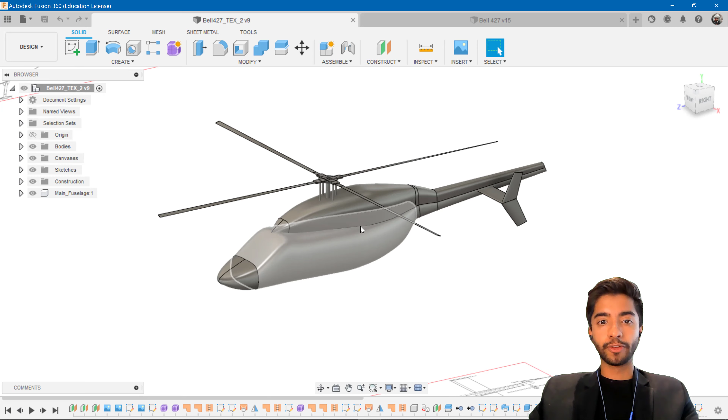Let's get cracking straight on to Fusion 360. Okay, so the last time we left off with this rotor section, and what we did was create this section over here, which is sort of the base or the hub of the rotor and the blades themselves.

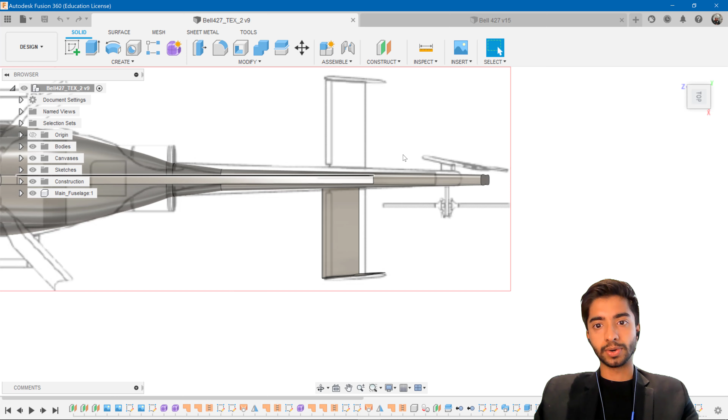In this tutorial, we are going to be focusing on the tail section. Now, I do remember saying that if you wanted to follow along to the tail section, you could just follow what I did with the horizontal stabilizer and recreate the tail section over there. You could also consider making the blades on the back similar to how we made the blades for the main rotor. But this is more of a follow-along video than a proper tutorial, just because the techniques I'm about to show you are something we've already covered.

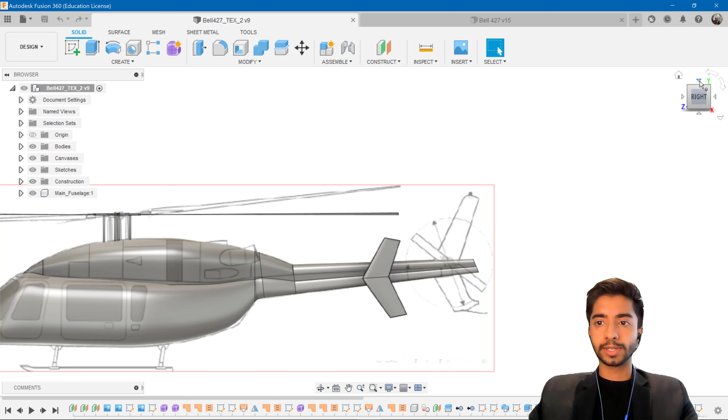All right, so let's get started. The first thing I'm going to work on is this back tail over here. It sort of looks like a boomerang. And what I'm going to do first is extrude something outwards in that direction, so right over there.

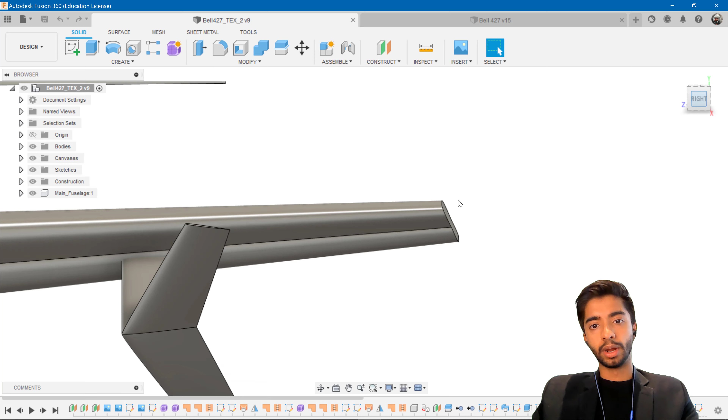And then we're going to slice that part over there at an inclination, and then we're going to draw this boomerang shape there. So first of all, let's just extrude onto the other side.

As you can see over here, the airfoil section is only about this small, so the chord of that airfoil should only be this small. So what I'm going to do is, from the top view - we're still sketching on the right plane, by the way, but I've switched to the top view - I'm going to hover my mouse somewhere near that section there, because that's where the line of the airfoil ends.

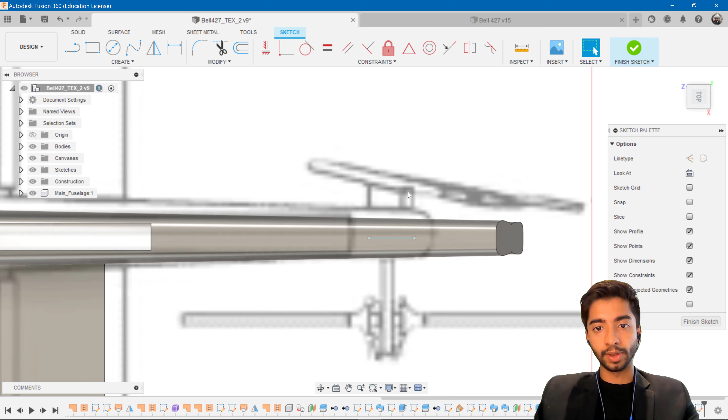And I'm going to drag backwards till the end of that airfoil. If you were confused why I did what I just did, all you need to do is follow my mouse. You can see that the airfoil starts over here, so I'm going to drag that, and it ends over there. All right, so that's now our new chord line.

However, you can see this is in quite a bad position, so I'm just going to press M on my keyboard to move this up. All right, so it's as simple as that. Okay, and I'm going to press OK. Now, we know that this is a chord of the airfoil, so I'm going to turn this into a construction line.

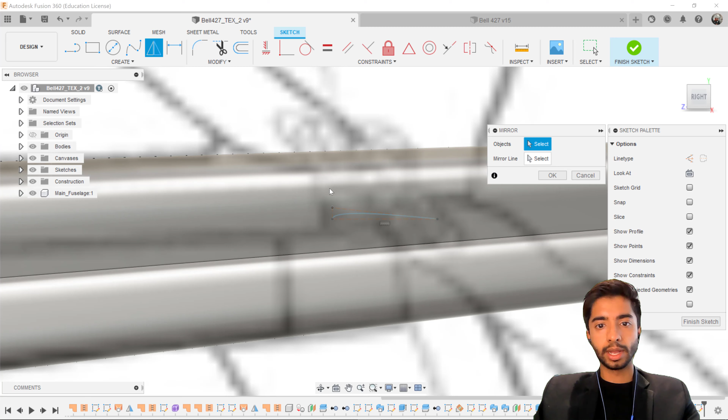I'm going to go to Create, Spline, Control Point Spline, and I'm just going to draw an airfoil there. Again, I'm just going to mirror this for simplicity. If you do know which airfoil you are using, please go ahead and use that one. All right, I'm going to finish the sketch here and go back to the top view to make sure things are still all right, and they are.

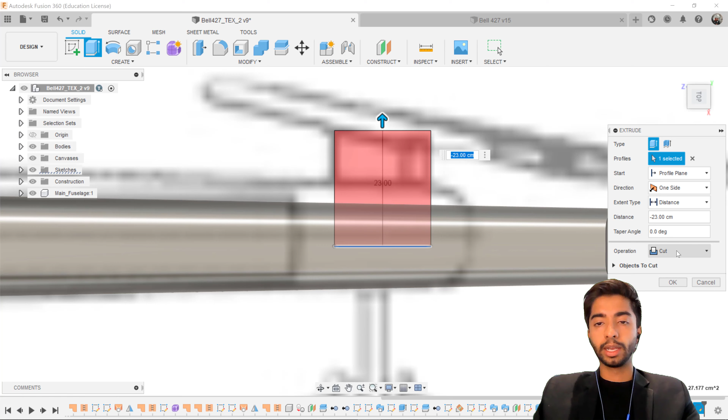Okay, I'm going to go ahead and press Extrude and make sure you've selected that surface there, and just drag it out till this position. Again, obviously instead of cut, we want to make it a new body, and I'm going to go ahead and press OK. And there we have it.

So that's our first main step. We're not going to mirror this because on the other side we only have this rotor section, and we only have that boomerang section on the top. I do apologize for calling this a boomerang again and again - I do not know the technical term for it, so please bear with me.

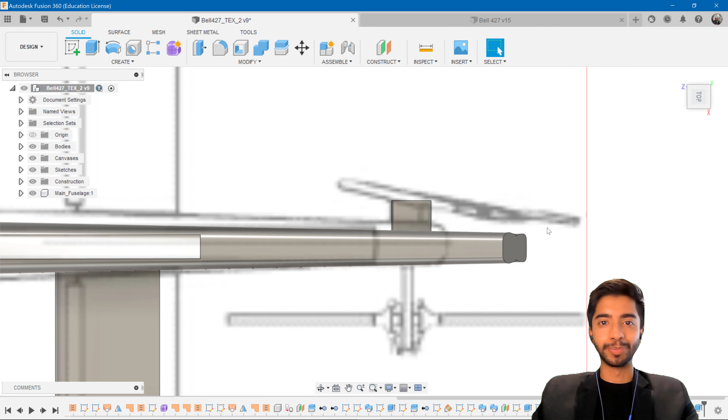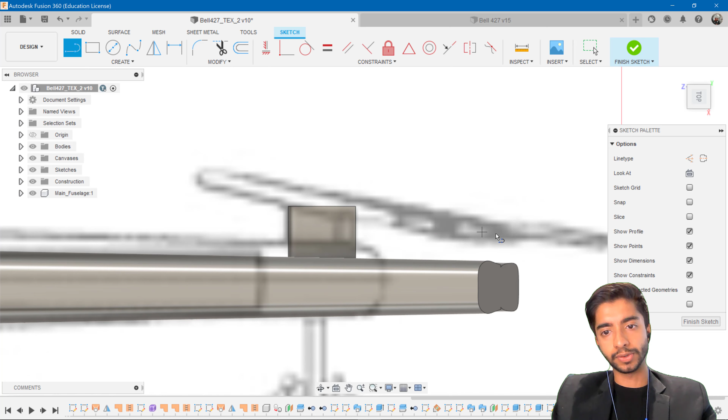Okay, now we're going to go ahead and slice this at an inclination. So just grab the Create Sketch tool, and you can draw on the top plane. Currently it doesn't really matter where the sketch is, because we're just going to be using it as a knife. So I'm going to press L on my keyboard, and what I want to do is draw at an inclination similar to this top view of the boomerang. So I'm going to maybe do it something like that.

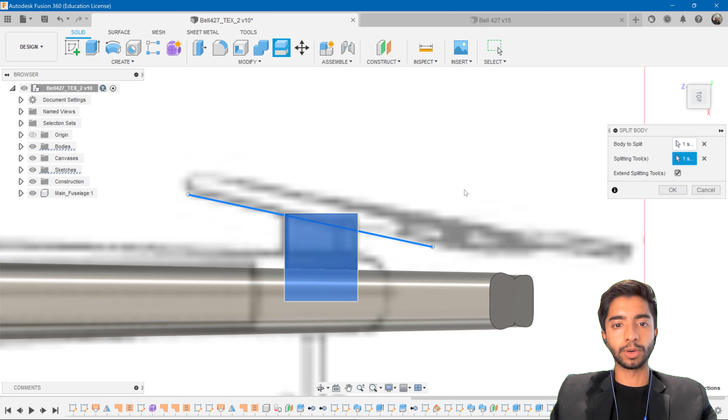I'm also going to leave a little bit of space here just in case there's a problem with the slicing. Okay, I'm going to finish the sketch, grab the split body tool, click on this one as the body to split, and the splitting tool is going to be this one. I'm going to go ahead and press OK.

Now, if you open up your bodies folder, you'll see that this is the one that we want to remove. So body 94 in my case. I'm going to right click on this and click remove. And there we go, we don't need that anymore.

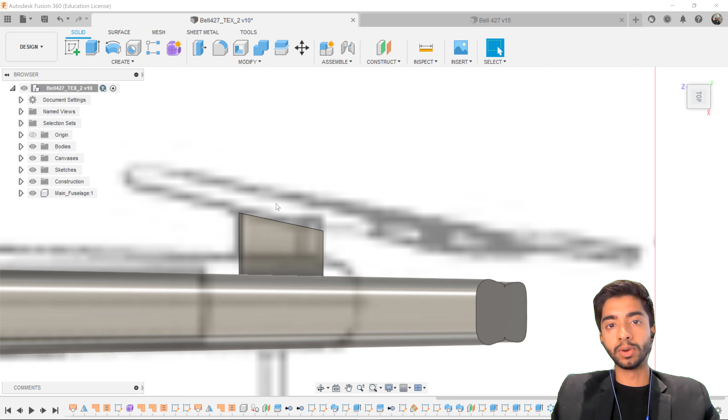Okay, now the next thing we're going to do is create the airfoil, which is orthogonal to the airfoil we had created on this surface. So what I'm going to do in order to do that is just revolve around till you can see the other section of the airfoil over here.

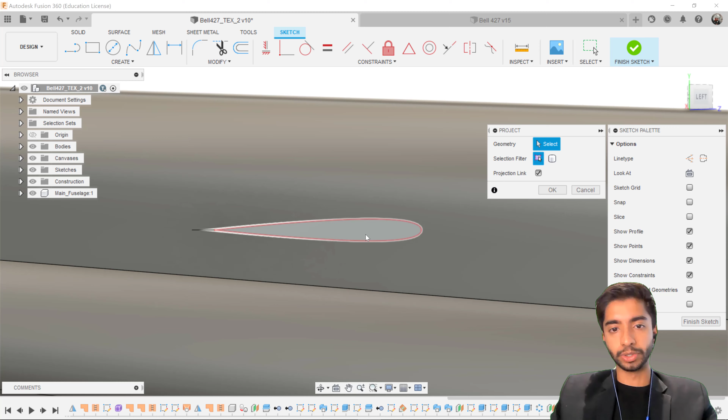I'm going to create a sketch on this plane, so that's the new surface that we just created, which is at an inclination. I'm going to press P on my keyboard to project, and I'm going to press OK. Then hopefully we will get two of these points, so the one is the leading edge, the other one's the trailing edge.

So I'm just going to draw a line between these two. Okay, and I'm going to finish the sketch. So we need this line to be able to create the orthogonal surface.

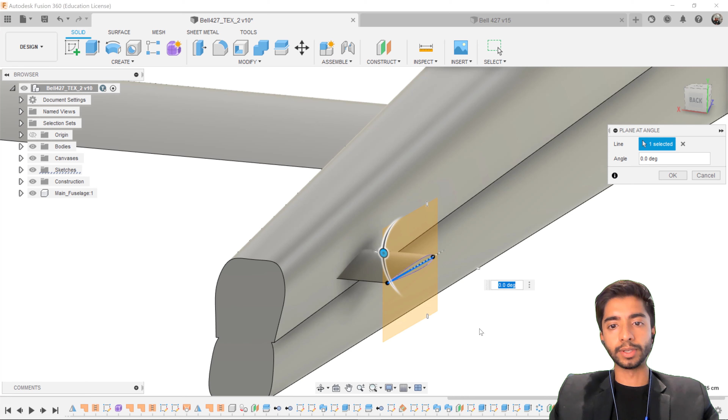So construct plane at angle, and you can just click on this. But instead of 0 degrees, we now want it at 90 degrees. So now this is at 90 degrees to the airfoil that we created earlier.

Great, now we're going to go ahead and create a sketch on top of this new plane. Now, because we selected that plane to sketch on, it will obviously take us to the top view or something close to the top view. What we want to do instead is leave the sketch on the top view, but go to the right-hand side, just so that we can measure where the boomerang starts and ends at that point.

So I'm going to click the line tool, and you can see this sort of cursor, which is a line. It's not actually a line, it is a cross from the upper direction, but when you look at it from this direction, you can only see a line.

So what I'm going to do is, if you just follow my mouse, you can see that this is where the boomerang is going to end. So I'm just going to click over there, and I'm going to drag that line back till there, because that's where the boomerang is going to end.

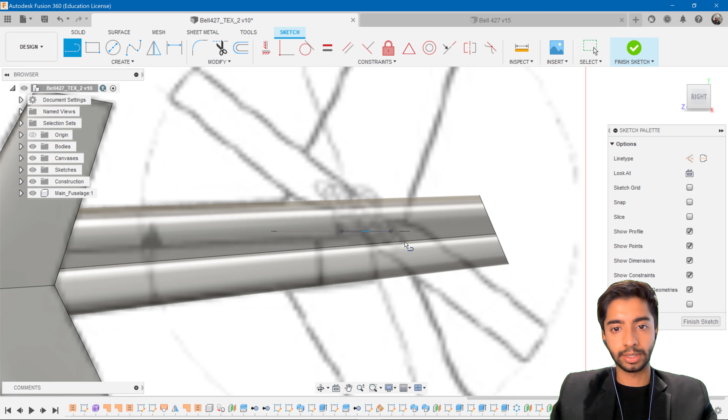Okay, now if you go back to the top view, you can see that we've just created that line, and I'm happy with this, so I'm going to stick to this line right now.

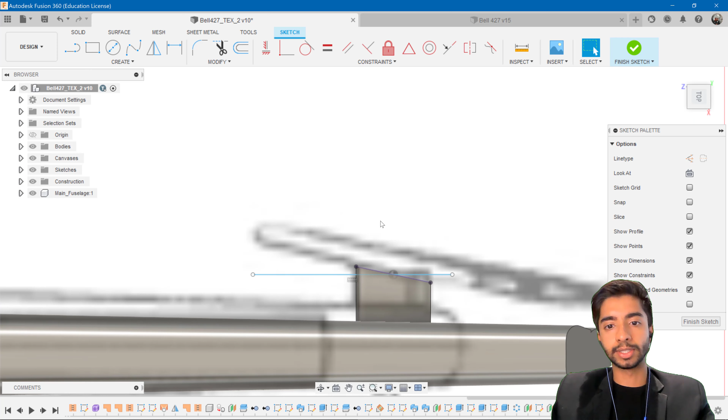Now what has happened is that this has become a line which is parallel to the line of symmetry, but we want this to be at an inclination. So what I can do is press escape, press P on my keyboard, and project this purple line over there. I'm going to press OK, because that is the inclination that we want.

I'm going to press L on my keyboard again, or you can click the line tool there. Start from this point, hover over to the purple line, but do not click anything. Just hover over the purple line and drag upwards till you see it automatically snapping. This snap is basically representing it being parallel to the purple line. You can see the parallel marks on the purple line as well as the new line that we've just drawn.

Okay, and the other thing you can do is hover over this point, but do not click, and you can just drag up, and you can see that this is now right where the line should be, the point, and it's also parallel to the purple line that we wanted. It's a neat little trick of hovering that Fusion 360 is really good at.

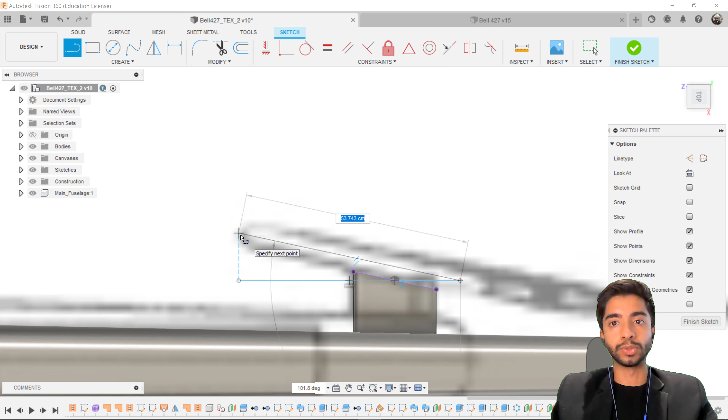Okay, and now we can just double click and the line is created. Now I'm going to press T on my keyboard to trim this line because we no longer need it. And there we have it, that's a good section that we need. I'm going to trim that as well. Okay, maybe we can't, let's just leave it there.

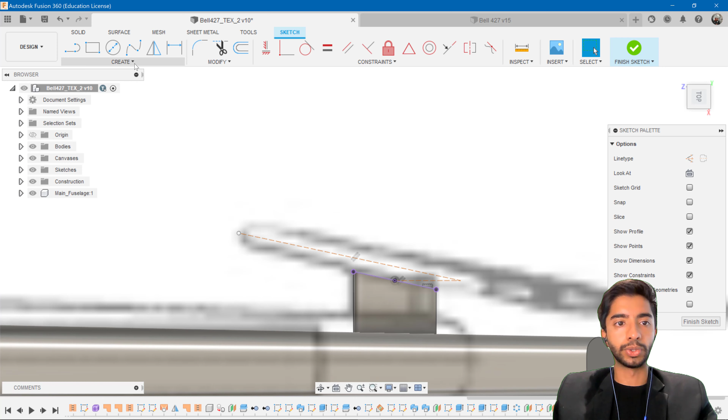I'm going to turn this and this into a construction line. And I'm going to create spline, control point spline, and I'm just going to draw the airfoil over here.

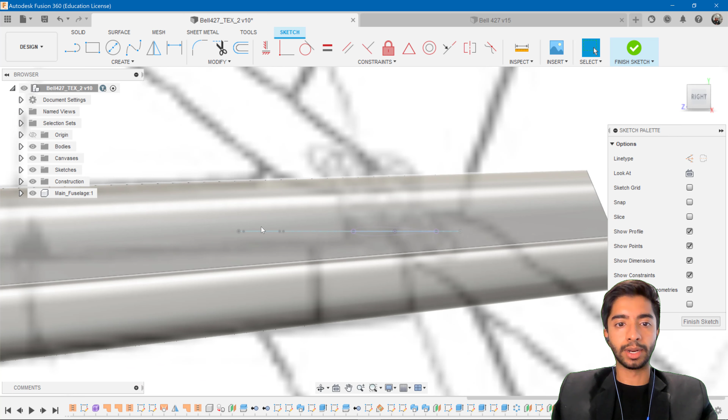Okay, and again, if you do know which airfoil you want to use, please go ahead and do that one. Mirror, so I'm going to select this one, and the mirror line is going to be this one. There we have it, simple. Okay, now let's go back to the right view to make sure that it is indeed the correct position, and it is. Go back to the top view, and it's covering that very, very well.

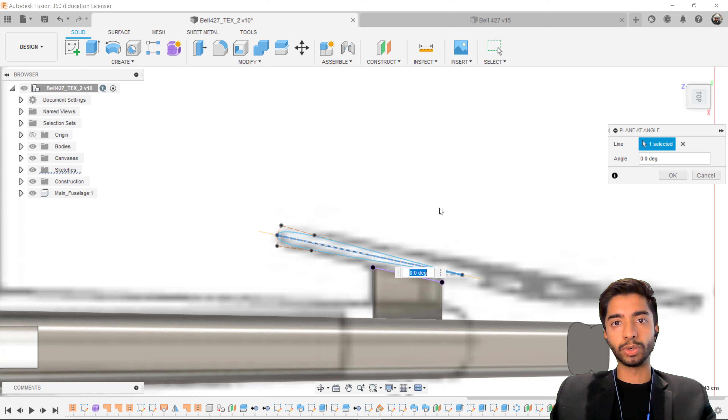Okay, now we're going to be using this airfoil to sweep the boom shape. So I'm going to go ahead and finish the sketch. Okay, so once you've clicked on Finish Sketch, now let's go ahead and construct a plane at an angle, and we're going to choose that line over there, which is the chord of the airfoil, as our reference line. Okay, and if I revolve around, we do want it to be at that angle there, so I'm going to go ahead and press OK.

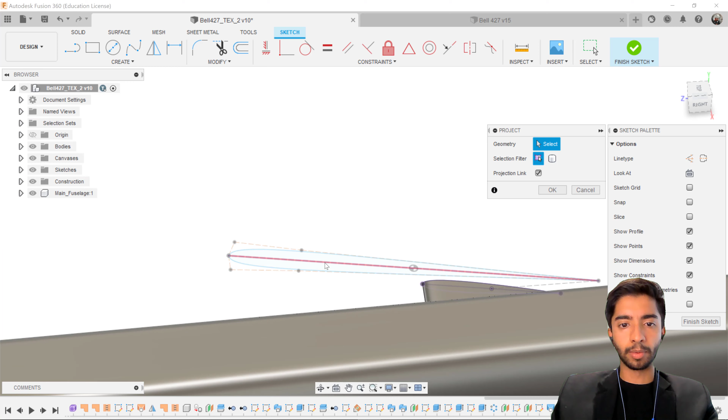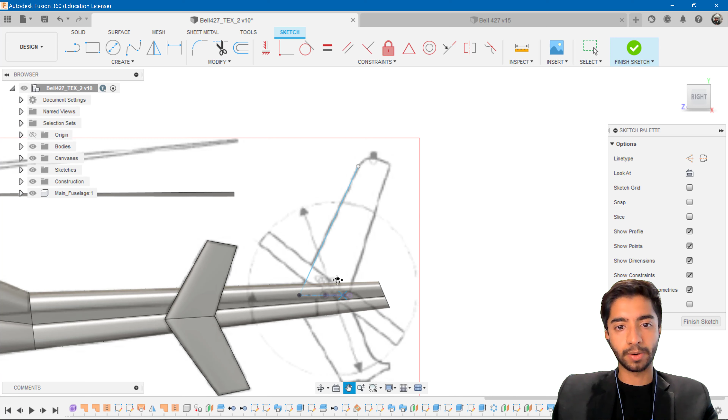Then you want to create a new sketch on top of this new plane. All right, and hopefully it should take you automatically to that reference line. Now I'm going to press P on my keyboard, and I'm also going to project that chord line again. And you'll see why this is a neat little trick to have. Okay, I'm going to press on the line tool, and I'm going to let it snap to that purple section that we just projected. Go back to the right plane, and I'm going to drag this upwards till where it's a straight line. So somewhere till there. All right. And similarly, I want this to snap from there to there.

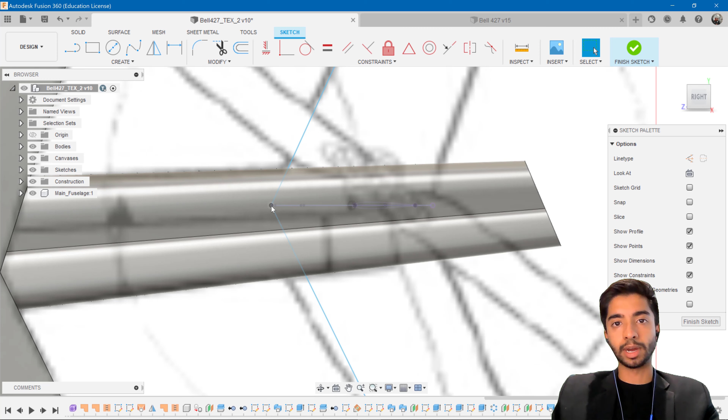Now you can tell there is a bit of a misalignment between the blueprint and the sketch that I've just created. And this is because I estimated where that position would be when we were first creating the first airfoil. If you want to, you can just go back in time and drag that point forward and come back to the present time in the timeline, and hopefully it should fix itself. It's a neat little trick that Fusion has.

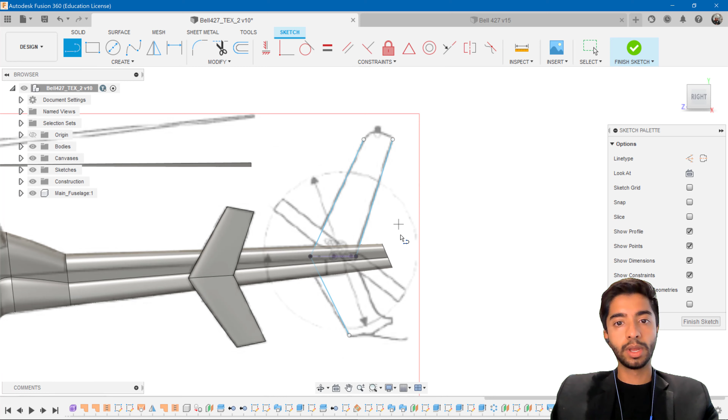Okay, and I'm going to create a new line, and I'm going to let it snap to the back point of the sketch we projected. Go back to the right view, and then I'm just going to drag this up till somewhere here. Okay. Similarly, I wanted to do the same thing in the back, so somewhere there. And now you can see we have some interesting geometry over here. So it's not really straight anymore, but it is an arc.

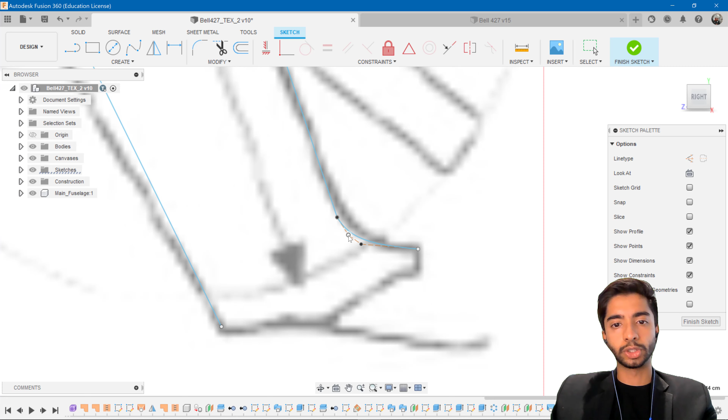Just to approximate that, I'm just going to create a spline. So I'm going to click on that, go there, and maybe just do it till somewhere over here. Okay, and we'll see how Fusion sweeps this out and how the geometry works. And obviously we can go ahead and change it later on. So first off, I'm just going to finish the sketch over here. Okay, and now what we're going to do is sweep.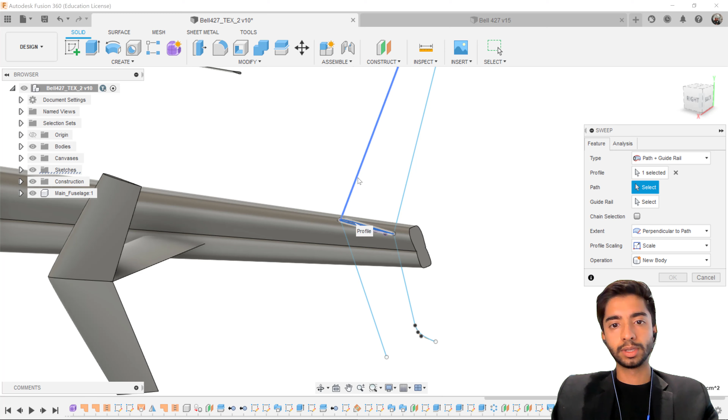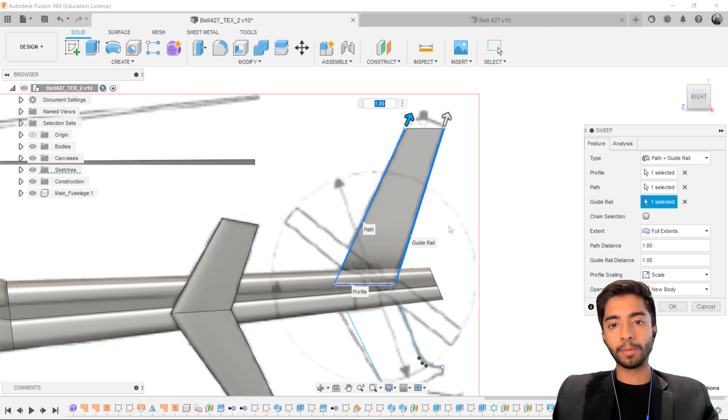So create, sweep, and instead of saying a single path, we want to say path plus guide rail. The profile we want to select is this one. For the path, you just deselect chain selection for now. Path is this one, and the guide rail is this one. If this doesn't work, just try swapping the path and the guide rail, and hopefully it should make sense. Now, currently we have perpendicular to path, but if we want to, we can just say full extents, and there we go. That is how our boomerang looks now. Okay, I'm going to go ahead and press OK.

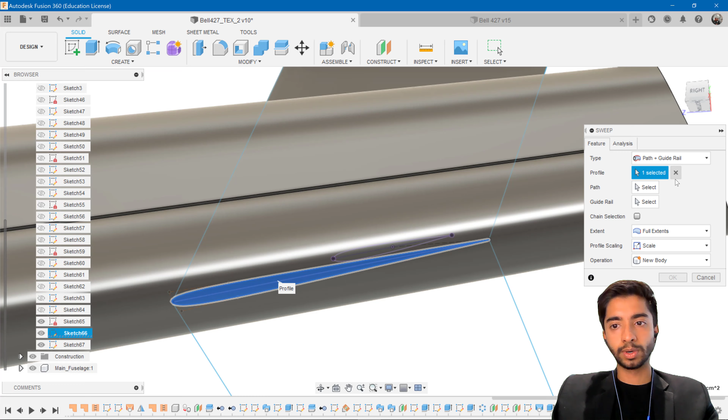And now we're just going to repeat the process. So go back to the sketch and activate the last sketch that we created, because we still are not done with it, and also the one before that where our airfoil is. So I'm just going to go to create, sweep, again, path plus guide rail. The profile is this one, the path is this one, and the guide rail is this one and this one, because we still want that little section over there. Again, instead of join, I'm just going to say new body for now, just in case there are any errors in the future. Okay, I'm going to press OK. And there we have it.

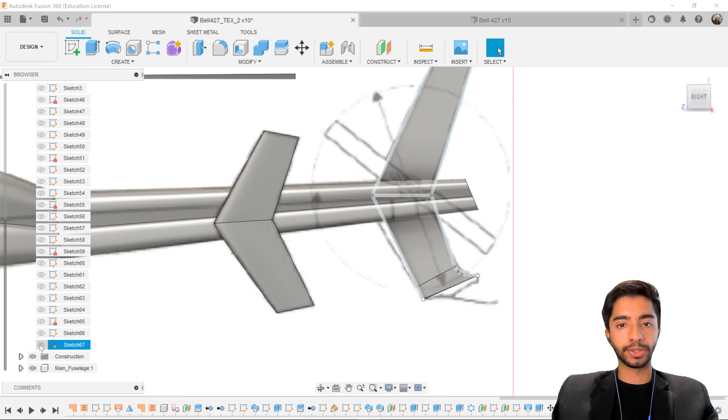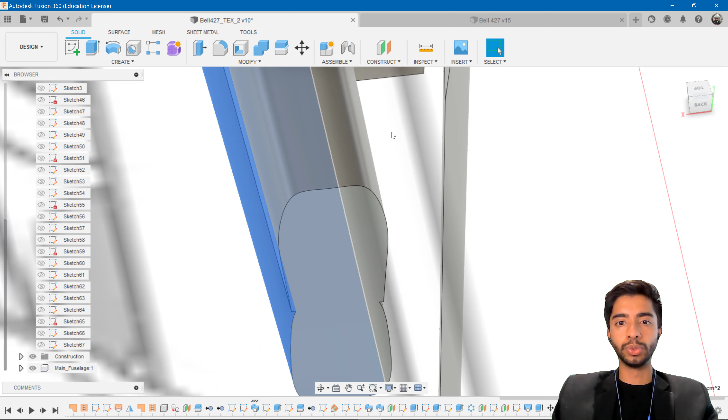So now we can hide all the sketches from before, and that is our boomerang section completed. Now, obviously, if you wanted to thicken up the airfoil, you can, and you can see there is a little bit of a gap between the boomerang and that shape over there. If you want to bridge the gap, you can either choose to take the boomerang and put it inside, or you can just extrude this span over here a little bit more. So I'm going to press extrude, and I'm going to select that airfoil surface there and just bring it forward. So you can either do that, or you can pull it back in.

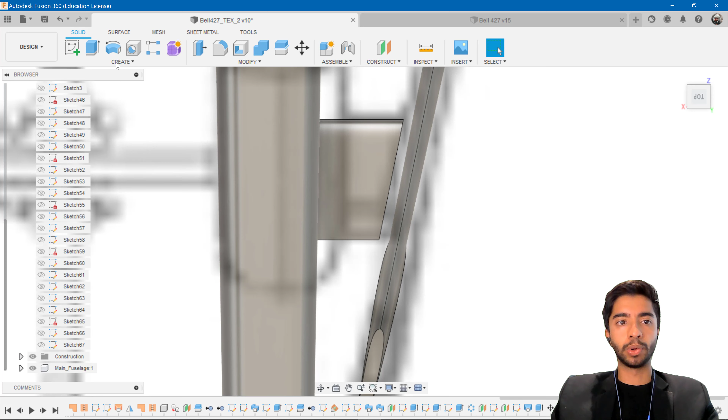Here you can see that it's actually done it at an inclination, because that's what extrude will do. So instead of extrude, let's try press pull. So under modify, we can click on press pull.

And now if I just hide this body and this one as well, and what I want to do is click on this one, bring back the two bodies just so I could select it, and then pull it. Okay, and now hopefully it should be straight. Yep, so that's the difference between press pull and extrude.

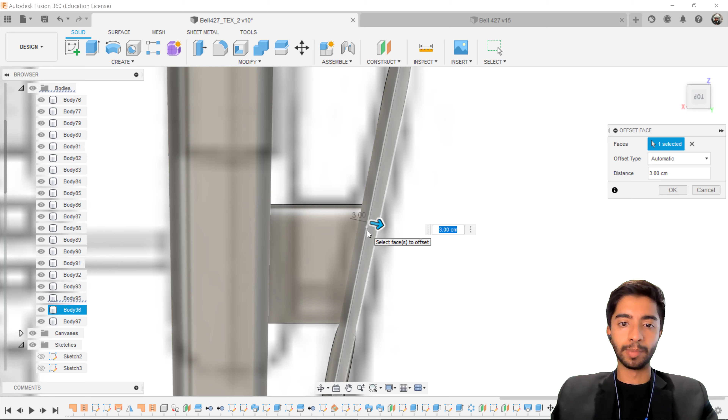Extrude will literally take the cross section you've given it, and it'll just extrude orthogonal to that section. But press pull will make sure there's continuity with the previous section that it was in. Don't quote me on this. This is just what I've seen with experience, and hopefully it makes sense to you as well. All right, so I'm going to go ahead and press OK over here, and now we can go ahead and work with the rotor section.

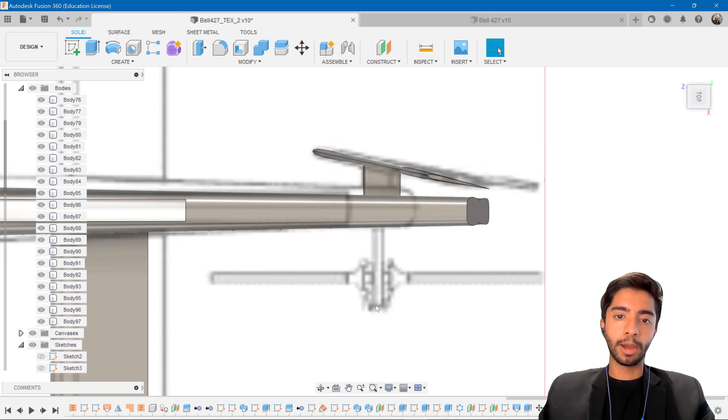Okay, so the first thing we're going to do is create just that cylinder over there. So the cylinder that's poking out, and again, I'm just going to make this very, very simplified, and it's purely for visual purposes. If you want, you can just follow along to what I did for the main blades of the rotor of the helicopter, because that's pretty much what I'm going to do over here.

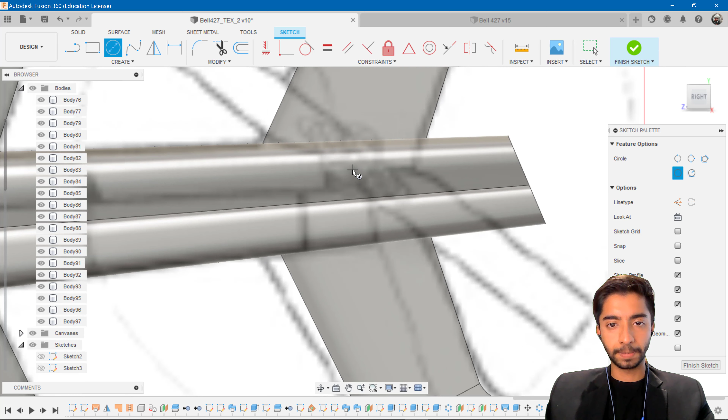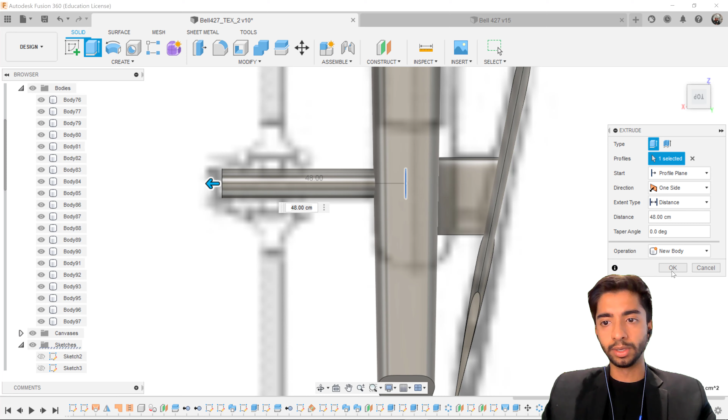Okay, so I'm going to create a new sketch on the right plane, and then I'm going to press C on my keyboard to create a circle, and I'm going to do that somewhere over here. Okay, and maybe I want to make this 7.5. Finish sketch, and I'm going to extrude that outwards. Okay, that was a good guess of where the circle should be. So I'm going to just leave that till there maybe, and I'm going to say new body and press OK. Okay, that's basically what's going to house the blades.

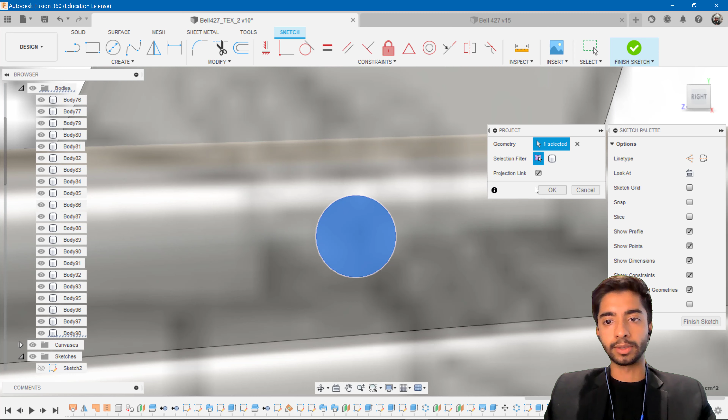Okay, and now we want to sort of flesh this out with a hemisphere on top. So what I'm going to do is I'm going to create a new sketch on top of the end of the circle, press P on my keyboard, project this, and press OK. And now we have the center of the circle. I'm going to press L on my keyboard for the line, and I'm just going to hover over that circle over there, drag upwards, click there, and drag downwards. So now we've basically just created a diameter.

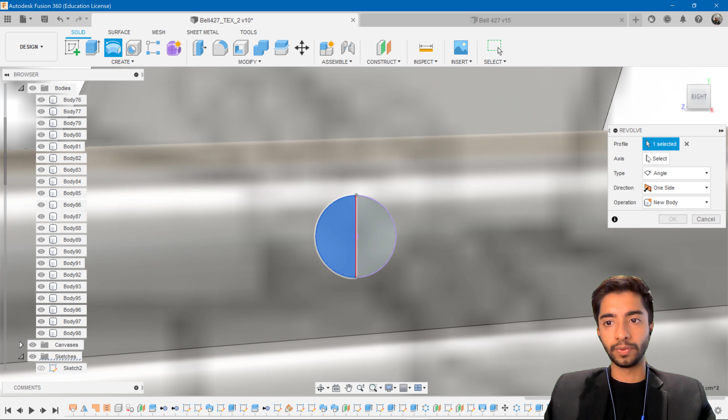I'm going to press Finish Sketch, go to Revolve. The profile we want is one of these, the axis we want is one of these, and the angle is 180 degrees because we don't want a whole sphere, we just want a hemisphere. And you can go ahead and press Join on this. And what you can see now is we've just sort of fleshed that little bit out over there.

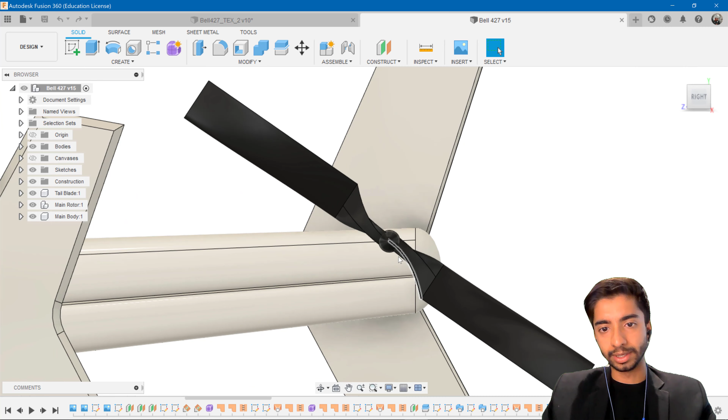Okay, now we can create the blades. Now these blades are a little bit fancy, and I believe in my own model I have also created that twist over there and then just extruded it out. But again, for simplicity's sake, I am just going to have one airfoil over here and one airfoil over here. Maybe we can just create an airfoil over here and just extrude it out, because I don't see a twist over here.

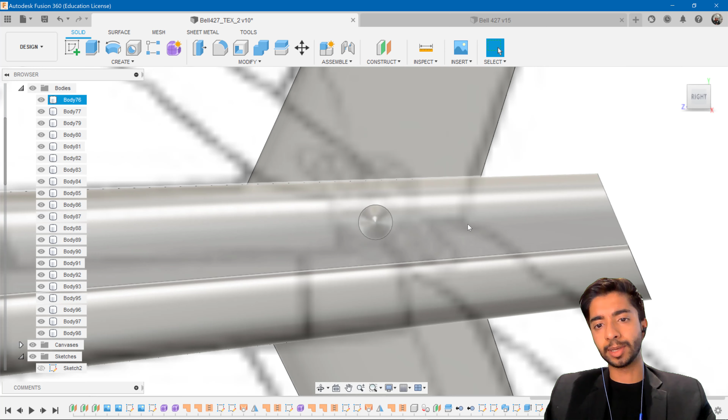If we do want to add something, I think it's going to be between the main hub and that first section of airfoil there. Okay, so first let's create a new sketch on the right plane. And again, we're just going to be creating it purely to be able to create the new plane that we want in the future. So just create that new line, and somewhere over here where this sort of linear process begins with a straight line, I'm going to drag from there to there.

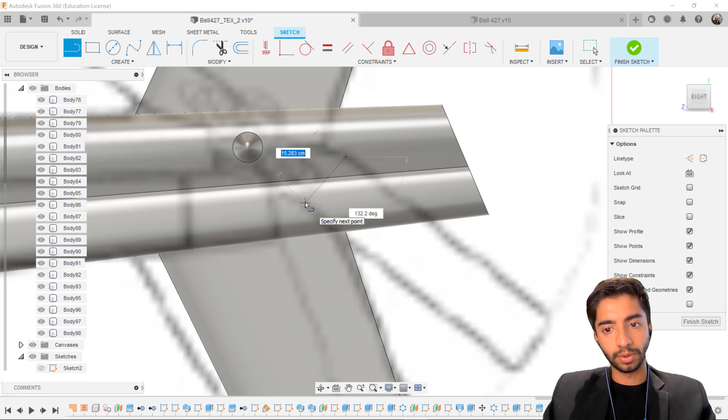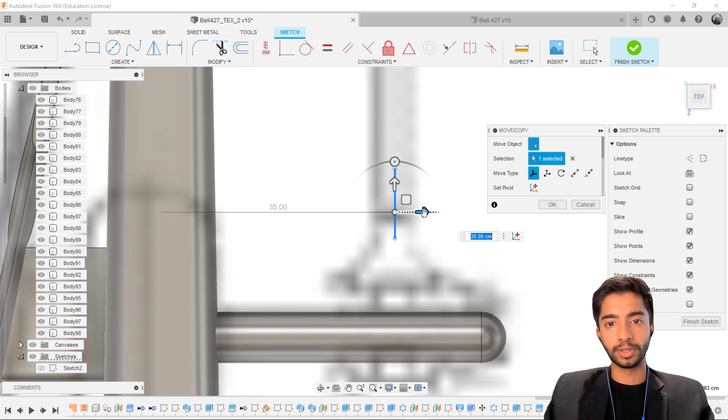Okay, and now I'm going to finish the sketch, or should we first see where it is? Instead of going to the front plane, let's go to the top plane and just click on that line we made, press M on your keyboard and just move that line over here. So to the center of this blade over there, and press OK.

Okay, and now just finish the sketch, construct plane at angle, and click on that line that we just created. Okay, and what this is going to let us do is it's going to create that plane over there on which we'll draw the airfoil. Okay, just press OK, and there we have it.

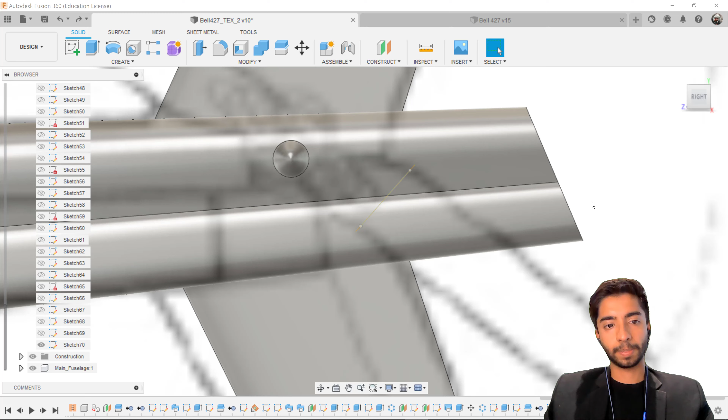Okay, let's keep that line for now, because when we draw on it, we know which direction to draw the airfoil in. So let's create a new sketch on top of this new plane, and we still have this line over here, which we can use as the chord, by the way. So I'm going to click on this and just go into construction, and you can see that hopefully, oh, never mind. You can't do that anymore because that sketch does not belong to this sketch.

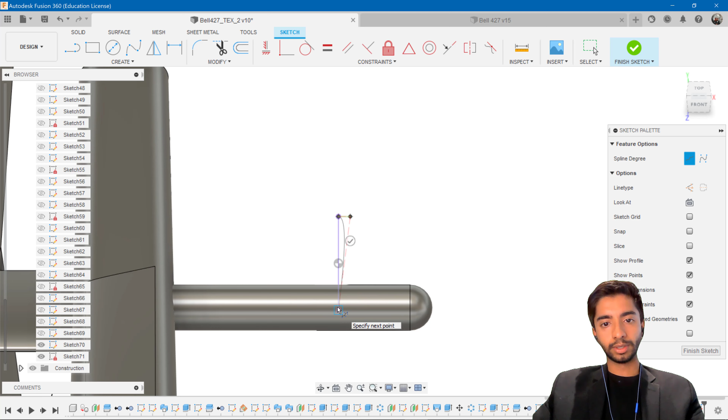So we're going to press P on our keyboard, and we're just going to click on that. And there we have it. That line is now part of our sketch. Great, so now I'm just going to create spline, control point spline, and also straighten my back, and just draw the airfoil in this direction, and then mirror it.

Okay, I don't actually know which direction is the correct one, but for now I'm just going to leave it like this. Okay, finish the sketch, and now I'm going to press extrude, click on that section and that section, go to the right plane, and just drag it out. And look at that, we were very close actually. So if our inclination was a little bit higher, we could have done that.

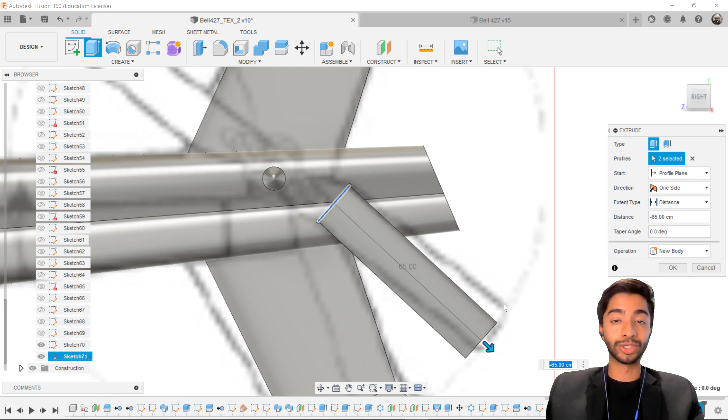Now, if you do want to go ahead and change that inclination, you can. I'm happy with this since this is just an estimate. And also at the same time, the rotors do move. So it's sort of inevitable that they go from there to there. So I don't think this is wrong, but if you want to match the blueprints, go ahead and do that. All right, so I'm just going to press OK now.

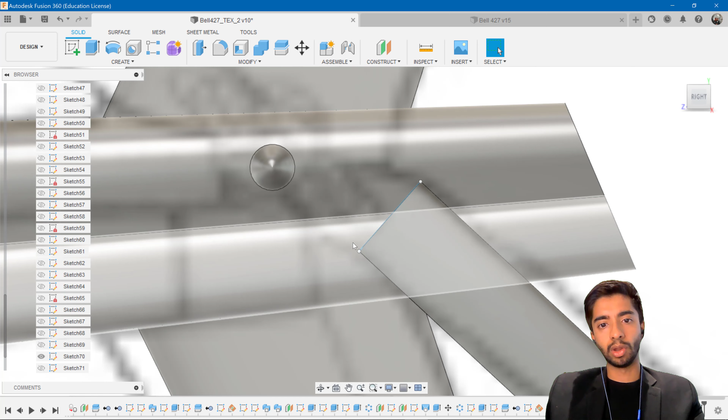And now I wonder if we could just create a sort of loft between this section and that section. So what we can do is we can go to construct, and maybe we can go to axis through cylinder and click on that cylinder that we drew earlier. And you can see this sort of turquoise line coming out of the cylinder. I'm going to press OK.

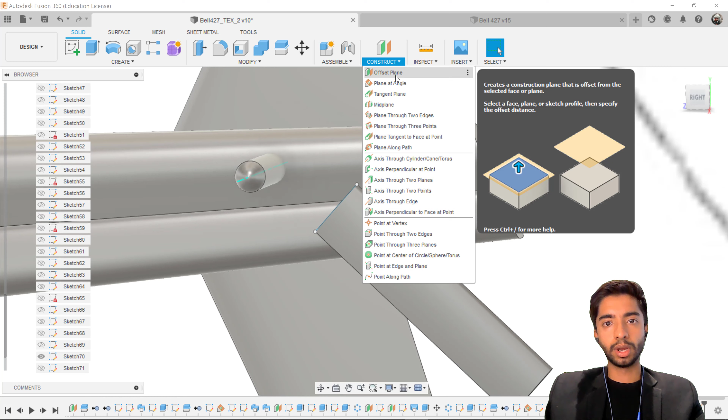And I'm also going to construct plane at angle, and I'm going to use that new line that we've just created. Okay, and this plane should be parallel to that airfoil section there. So for now, I'm just making it 40 degrees because it looks reasonably close enough. Okay, maybe 45, and I'm going to press OK.

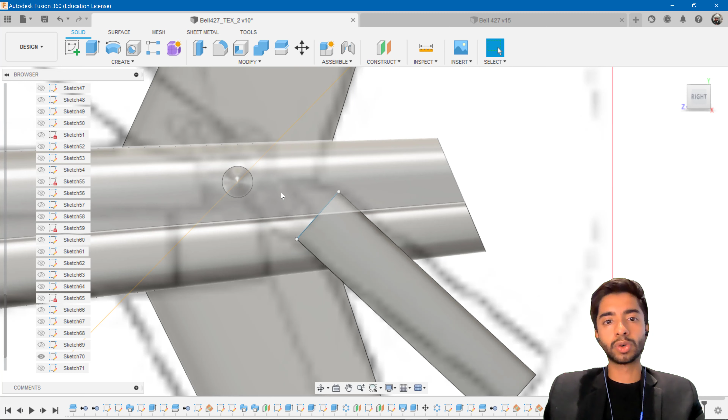And we're just going to draw a smaller airfoil inside this plane, and you'll see why. So I'm just going to click on this plane to draw a new sketch. Press P to project, because I'm going to project that hemisphere. And at this point, if things are getting confusing, don't worry. All the things I'm showing you are very optional things, just adding a little bit of detail.

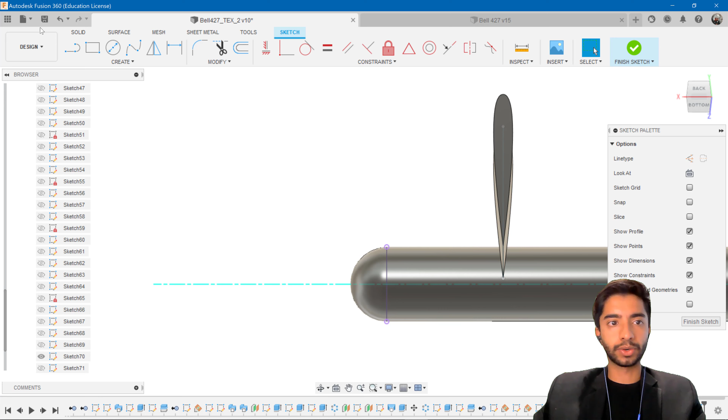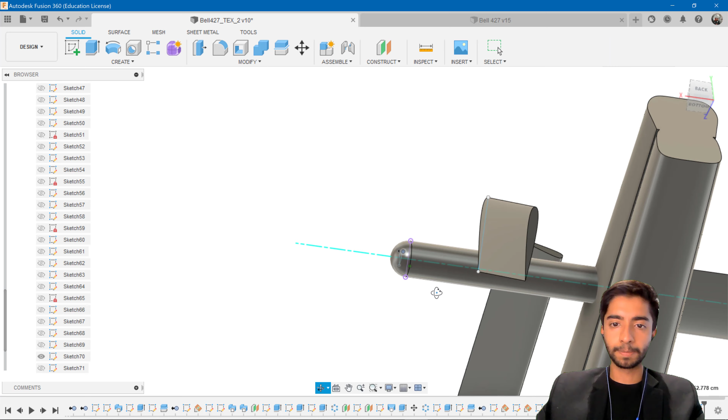Okay, and what I also want to do is create a new airfoil. So maybe the size of that, and create a spline, control point spline, remove the construction, do that, mirror it, our classic stuff basically. Again, this is a little bit thick, so I'm going to thin it out and finish the sketch. Okay, so now you'll see if I go to create loft, so we loft that section there with the section we already have.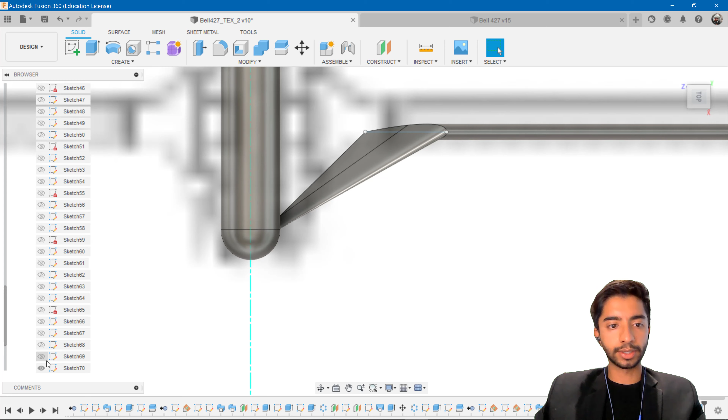So you can see this is interesting because our airfoil was over there and this other airfoil that we just created is over here. So instead of join, I'm going to say new body, and instead of actually having that sketch over there, maybe I want to have the sketch move in that direction. So let's see if that's possible. And maybe we could have it even somewhere there, because then it'll be a lot more smoother. There we go. I think that looks a lot better.

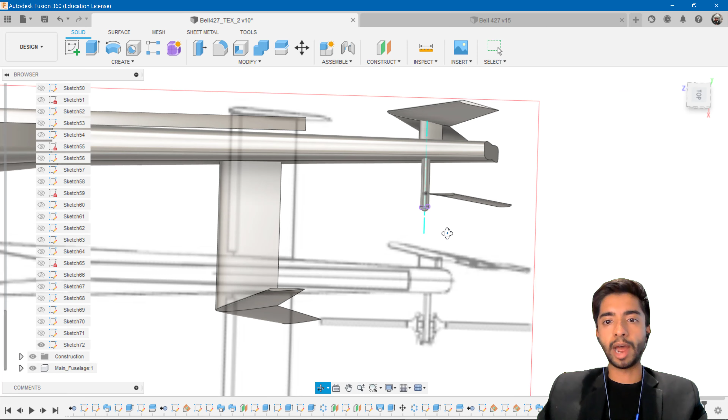And if you're happy with this, that's great. If you're not, try and play around with it. You never know what you might like. Okay, and as for the construction lines, I think I'm going to just hide that axis because we don't need it anymore. And the sketch, we don't need it anymore.

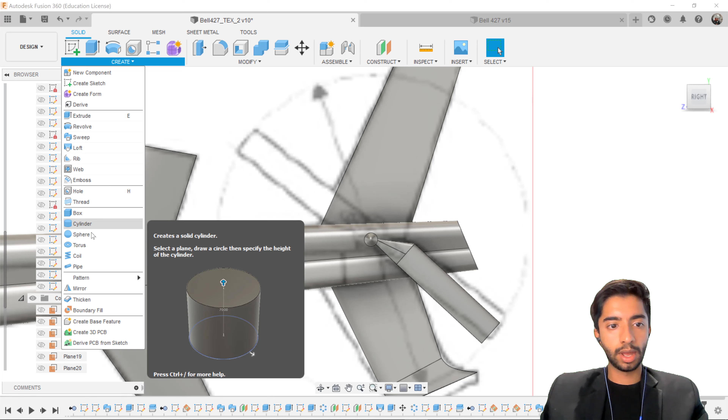So once you're happy with the blade, all you need to do is go to create, pattern, circular pattern. The type should be your bodies, and click on these two as your bodies, and the axis should be this one. And obviously, because there's only two, we're only going to press 2 over there and press OK. And there we go. Our helicopter now has a proper tail and a rotor in the background as well.